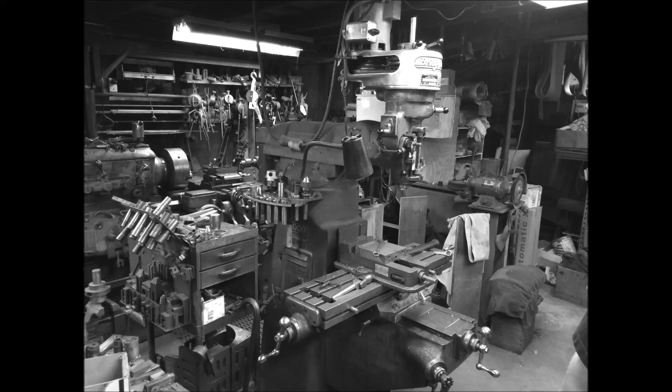I've been doing a little off-camera work here, and I'm finding a few things I don't like. So I've been prepping to remove the table. That part's going okay, which is going to require unhooking the ratcheting assembly here.

But in the process, I tried raising the table up, or maybe it's the knee, I'm not sure what you call it, but what I found is this elevation screw, the input screw, isn't frozen, but it goes to a worm type bevel gear that transfers to the vertical screw, and that vertical screw is frozen. I don't want to put too much torque on here. Unfortunately, to get to this screw, you have to come in from the bottom, so I'm going to end up having to pull this off the stand again.

Okay, so that's a little bit of a setback. I was hoping that I wouldn't have to do anything with that, but yeah.

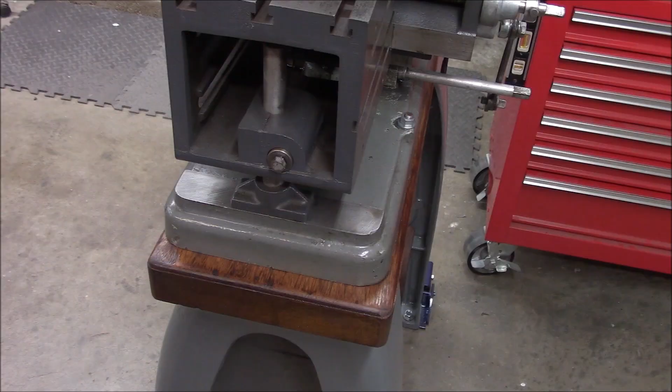The other thing is this front foot with the adjustable leg on it here. Something is frozen in here. I was able to loosen this up, and I don't know how much force it normally takes to adjust this, but it appears to be frozen also. But I don't think that's too big of a deal, I think that's just a matter of getting in there and doing some cleaning.

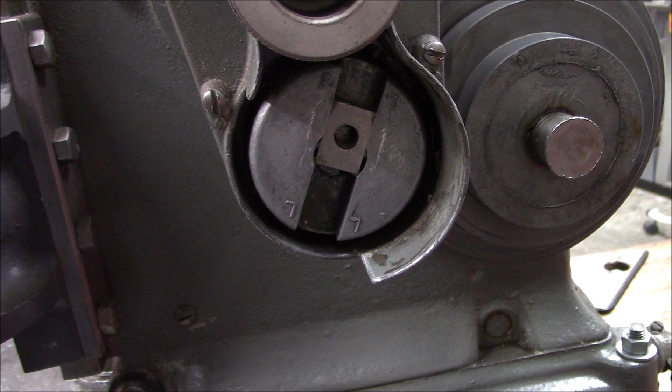Little midstream update. So we got the table off, and let's come back to that in a second, but I also have some good news. So this feed stroke assembly looked like it was severely worn, but it was just dirt and some old dried grease buildup. So that's good news, this looks fine. I think that will be good there.

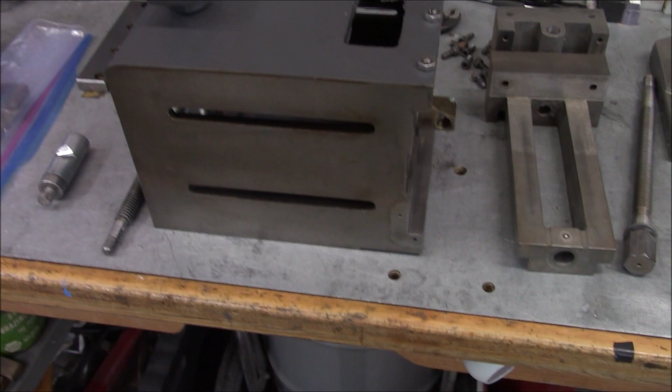Over here at the bench, so here's the table. Okay, there is the lead screw nut. There is some play in that nut, so I'm going to look at that and evaluate whether we're going to replace it or make a new one or what we're going to do there.

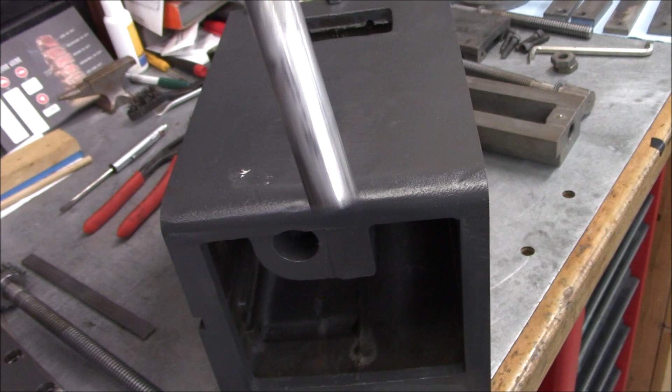We had one heck of a time. This is upside down, by the way. We had one heck of a time with this foot, and it would not budge.

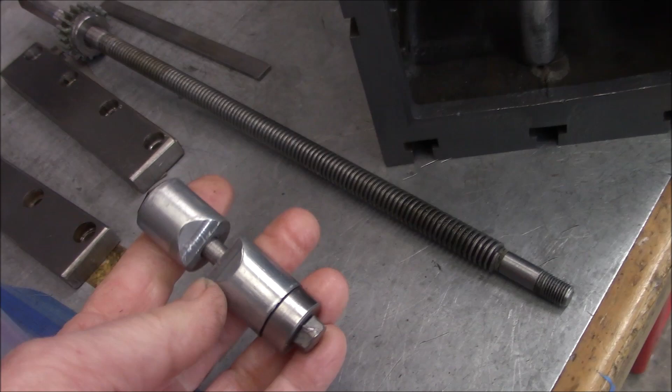So the problem was the clamping mechanism here. These little clamping pucks, they're made out of the Zamac material, and they're actually deformed.

It's kind of interesting, look at this. Look at this nut, I mean it's been gronked on pretty good. Let me see if I can take this off with one hand here.

So you've got, that looks like probably a 5/16 bolt. You've got a steel puck here, spacer, washer, and that pushes on this guy, because this is all Zamac. Can you see that distortion? This thing's really been gronked down pretty hard. So not only has it worn into the cutout here, this is actually mushroomed and expanded out on the end. So it was stuck in there.

And then this is the one that goes in the back, same issue, this one was even worse. And if I can get this out of here, what they have... Alright, as soon as I turned the camera off, it fell right out, of course.

So they just cast in a hex here, and then they use this little brass nut. The rounded part goes down like such. Okay, so anyways, that's how that's made.

I think what I don't like though is this shaft is not hardened, it's just regular mild steel. I think I'm going to make a couple of these, probably out of brass. This stuff, in my opinion, is just too soft. I don't want to make them out of steel because I think that may end up galling the support column here. Probably make these out of brass, and I can just thread the brass. I don't need to do this, and that'll still be fine.

And I'm not crazy about this bolt, I'll probably make a new one with a different type of head on it. Probably just go with a square head so it matches everything else.

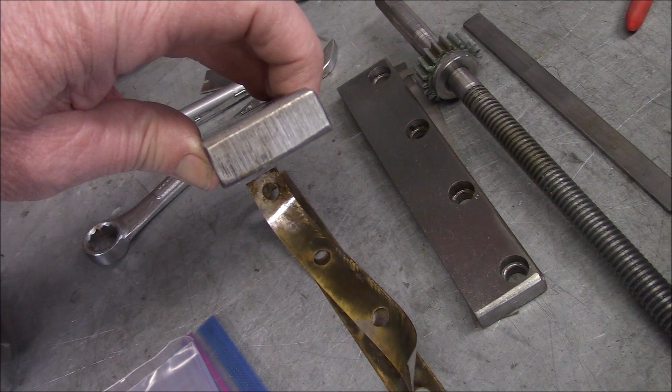That makes more sense. Okay, here's the retaining plates for the ways, and they are shimmed, and I've marked them with a letter punch so I know which is which. I need to measure and bag up these shims so I don't get them mixed up, although we're going to re-measure everything anyways.

Okay, here's the lead screw, and it appears to be in pretty good shape. It's got the Zamac gear. Now everything was coated with grease, this blue looking grease, including the lead screw, which is not right. Maybe okay on the gear, but not on the lead screw.

Okay, so we're going to fix that when we go back together. Here's the gib, it's got some dried up grease on here, but it looks like it's in pretty good shape. And then the actual way surfaces, they didn't do any scraping, it's just as machined.

I don't know how far we'll go with these. I'd like to check them at least, to see how flat they are. Looks like this side's got more wear than this side over here.

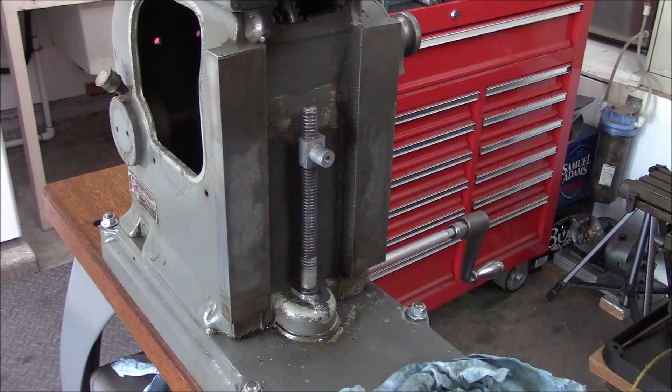Okay, we got the table off, no problem. And we solved the mystery of the frozen lead screw. It was actually the nut that was frozen. It was really frozen on there, because they greased it, and the grease dried hard, so it was almost welded to the lead screw. I soaked it with penetrant and solvent, and ended up having to warm it up a little with a torch to get that old grease to liquefy, and now we got it moving.

So I did some cleaning here because I didn't want to run any dirt through that nut. This nut is Zamac, but you know what, it feels tight, there's no play in that, so we'll probably just reuse it.

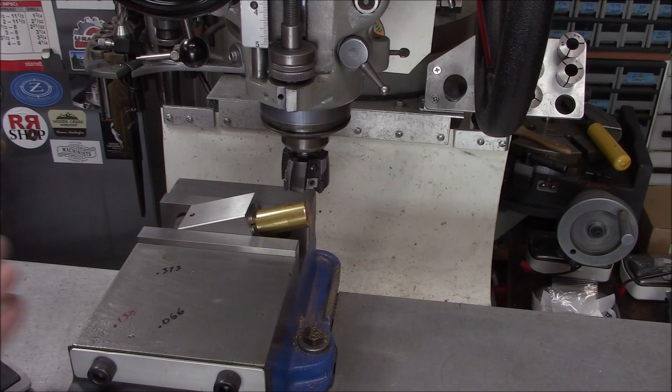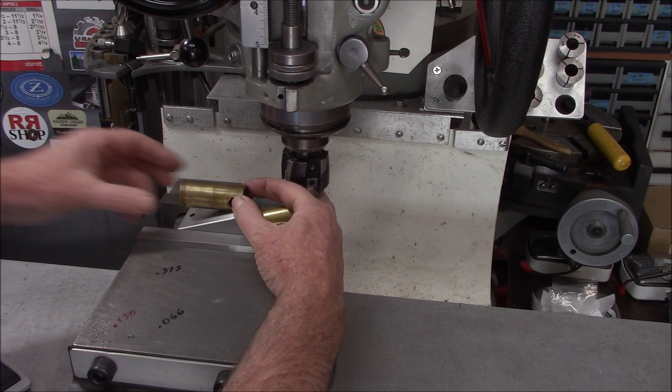We're going to take off this wedge part off of our feed nut here, and it's just for clearance. It's not anything critical, so rather than getting too elaborate, I got it in the collet block. I just put this on here and bumped it around until that was level with our block. Good enough. I got a scribe line on here of how far we need to go down. We're just going to mill it off.

Alright, let's get it a little more aggressive. Go 40 thousandths. I just don't know how well that collet block is holding this. I got it pretty tight, but still.

Alright, we're just about there. I think we'll just take 10 this time. We'll do a little closer inspection.

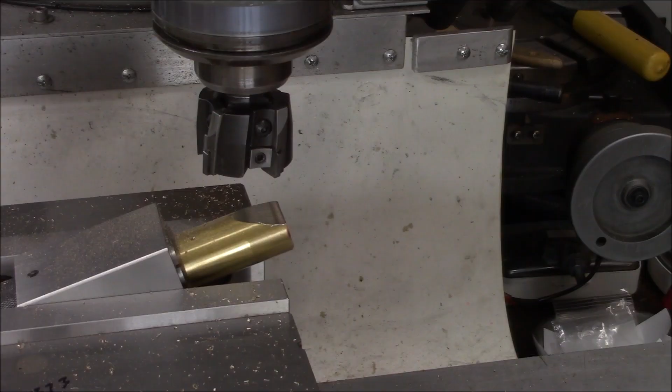Okay, I think we're there. Let me just check it off camera. Just doing the Mr. Bozo check here. Yeah, I think we're good. Seems to be matching up nicely.

Okay, I got grandson number 3 here. Say hi, Ethan. He's going to help me with the edge finder. He's going to let me know when the edge finder kicks over so we know when we're on the edge.

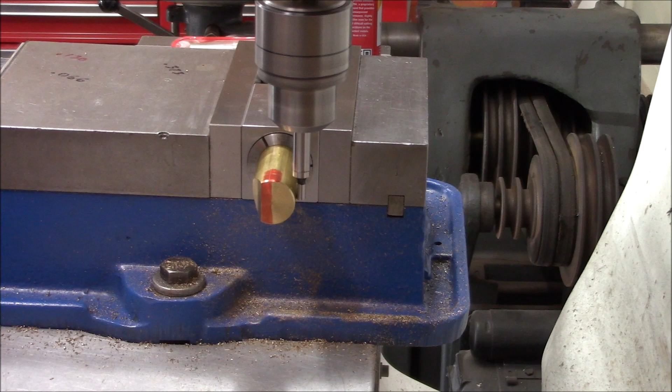Alright, you ready Ethan? Okay, you watching that edge finder? Oh, what happened? You're supposed to yell out and tell me. Okay, here we go again. Ready? How about that?

Sure? Is that good? Okay, I think you got it. A little bit further back. Okay, alright, so Ethan just double checked our setup here. We're ready to drill, we're on our scribe line and we're on center.

Okay, pilot hole. Does that look good? How's that look? Is that gonna work? No, it's too small. It's too small? Yeah, very too small. Alright, we'll put in the bigger drill bit then. Look how small that is.

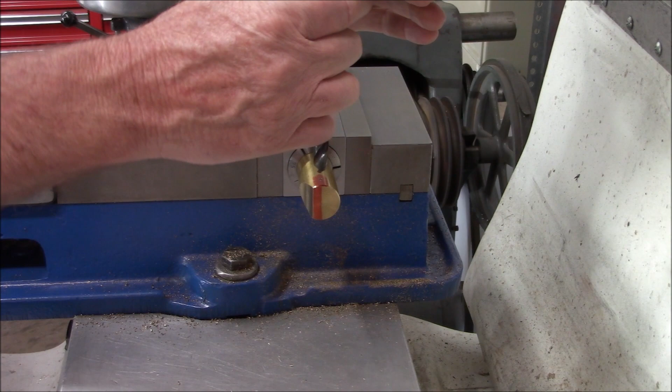That won't work, huh? Alright, well, look how big this hole is, compared to this one. Oh okay, so we need to make it look like that one. He's showing me the old one. I'm going to put it right here, okay? So remember what it looks like. Okay, so according to the boss, Ethan, we need to make it look like that. Alright, so I'm going to put that over here.

Safety glasses on. Okay, we're going to be throwing some chips, so we don't want to be too close here. Alright, here we go.

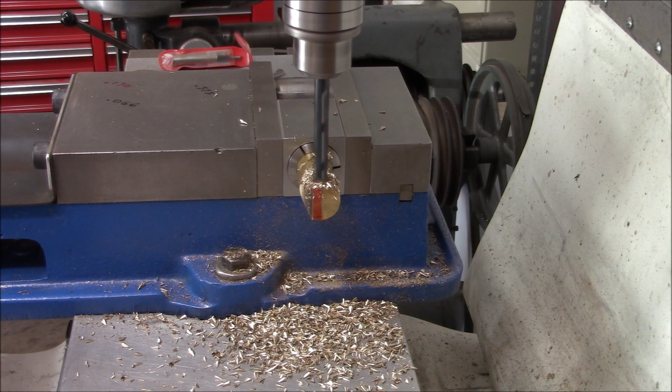Okay, we're there. We're through? Yep. All the way through? Yep. All the way through. Grab the old one, let's see if it's correct, okay? Okay, wait till it stops. Alright, let me take the drill bit out, then we'll take a look and see what else is needed.

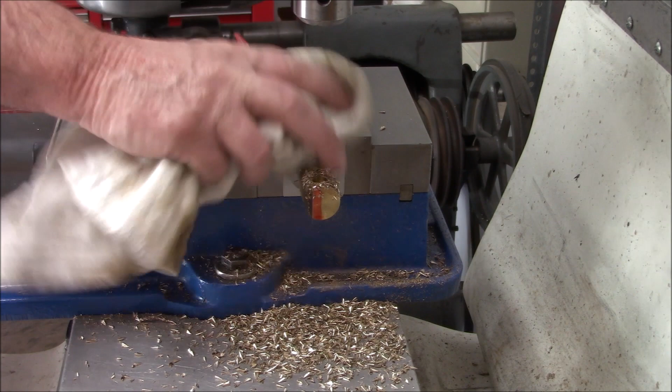That's a lot of little small pieces. Alright, so what do we need to do now? I don't know. You don't know? Well look in there, is there anything different? Can you see inside there? Oh, it's a little bit smaller. Yeah, but is there something else on the inside? Does it look like it's got threads in there? Because this hole is smooth, right? Yes. Okay, so we have to put the threads in. Alright, so that's a different tool.

Okay, now this is a left-hand thread, so which way do I have to turn it? Left. His left-hand, very good. Okay, lefty tighty in this case. Alright, here we go. Oop, keep up with our tap falling over here.

Break the chip. And we need it all the way through. Now you let me know when it starts coming out the other side. This is some tough stuff here. We gotta back it up, I see a little bit coming out the bottom. Oh, you do? So okay, it might be close.

We do not want to break our tap. Do you have another one of those? This is the only one we got - it just came in the mail today, even. So if we break this one, we're out of luck. Yep, you might have to buy 5 more. Because if that one breaks, then the other one breaks, and the other one breaks, and the other one breaks. Then you have no money, you're out of luck, right? Well, you still get paid because you stayed at work longer, right?

So this is kid logic here, okay?

We're pretty much done, right? Yep, just got to take it out of there, and then we're going to put a little bevel on there because I forgot to do that.

Okay, ready? We'll do a little chamfer just to make it look better and get rid of those little sharp burrs. Okay, I like that. We better do the other side too, okay? Yep.

Okay, so we line that edge up so that we're lined up, okay? Alright, see how ugly that is? It's got a sharp edge on there. We're going to get rid of that sharp edge, okay?

Okay, that's much better. Let's see how it looks. Okay, should we take it out of there and look at it? Yep. Okay.

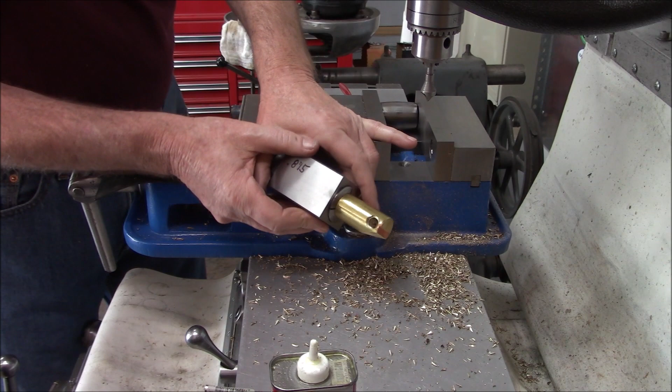Okay, let's move that so everybody can see. How's it look? Is that going to work? Oh, they're the same size. Okay. I guess I should hold it this way, that way they both look the same, right?

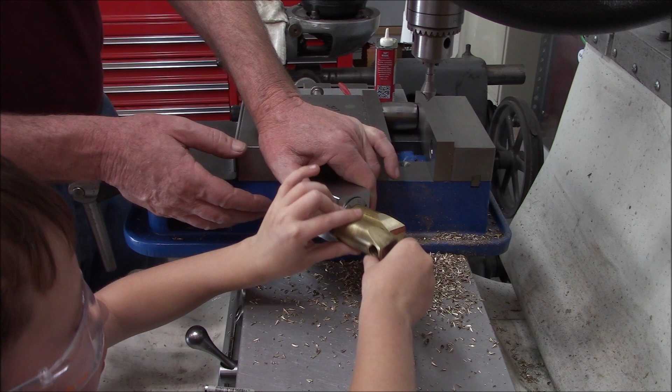This one's just a... oh, this one's a little longer. Alright, we're going to fix that, okay? Yeah, alright, good. Thanks for your help. But some of it's stuck in there, right? Yeah, some of it's in there, but it's still the same.

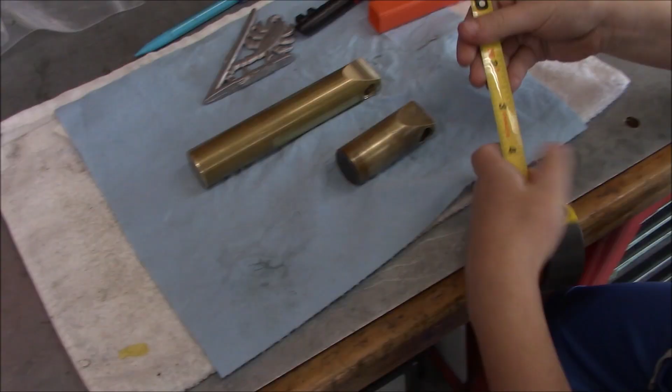Okay, we got to take it out of this block now. Right here. Right there? Just chop it off right there. Mhm. Okay. Not the measuring tape, though.

Here's how that nut turned out. I didn't get a chance to film it toward the end there. I did test fit it on the lead screw and it fits really good. So happy with the way it came out.

Okay, let me get a measurement.

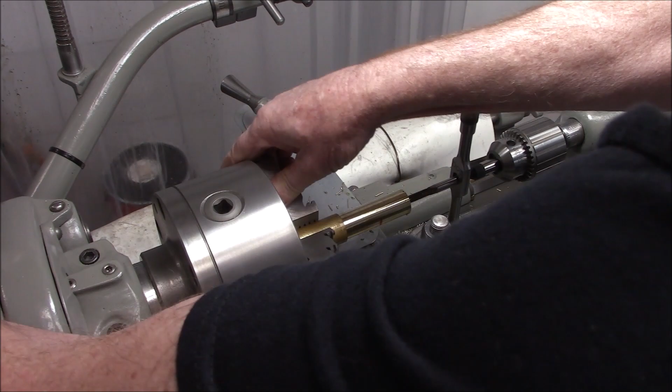Alright, this is going to take a few minutes, so I'll bring you guys back when I get this tapped out. We're going to give our parting blade a try. This is always an adventure.

So don't work on projects when you're tired. You guys probably noticed I forgot to chamfer those edges on that last part. Alright, let's face this guy off a little bit here. Parting tool did a pretty good job. We'll just get a fresh face cut here.

Working on a bit of a measuring challenge here. So I want to reproduce these locks for the table foot. So the table's upside down. This is where the foot or table support would go. And then the locking pucks go in this bore here. There's one on the back side, one on the front side. Okay, and then they've got this radius in here that would match this, but the trick is figuring out the center line offset. So trying to figure out how to measure that.

So what I ended up doing was just using a depth mic. This side here, this side's machined, and I had a little trouble. There were some burrs on here, so I had to stone this off. So I just came in with the depth mic and measured this distance versus this distance. And then had to do a little bit of math.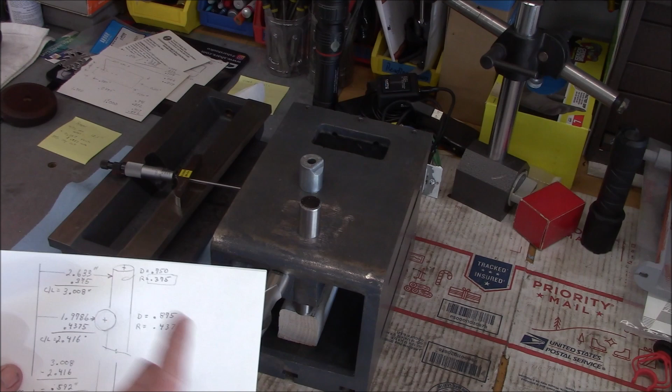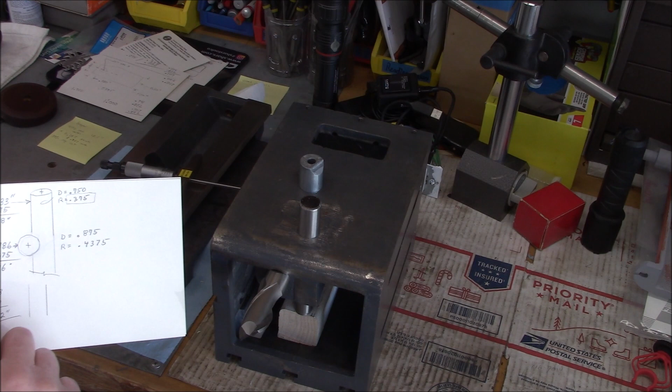So took the measured distance and then the radius of this guy and came up with 3.008. And then this one from this edge was this number plus the radius of this guy, which is a different diameter. It's 7/8, this one's 3/4. Added that, came up with this number, 2.416, subtracted the difference, and this is our offset, centerline offset between these two bores. So hopefully with that, I'll be able to go over to the mill and reproduce that little offset with a 3/4 end mill. All right, so let's go do that.

Feeding really light because I don't have a real good grip on that collet. There's not a lot of insertion into the collet. We're almost there. Let me get a light.

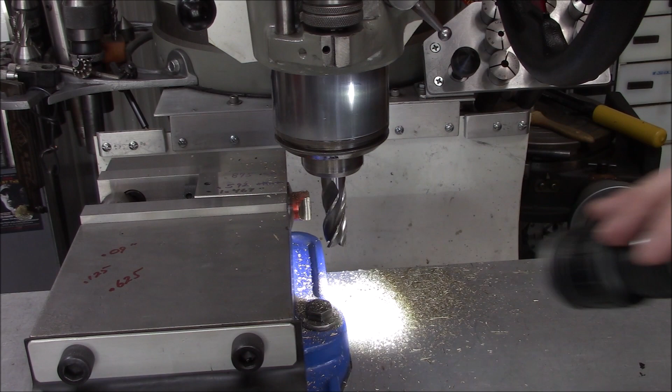Just a tiny bit more. All right, I think we're there. A little bit of deburring. Let's check it before we do the other one.

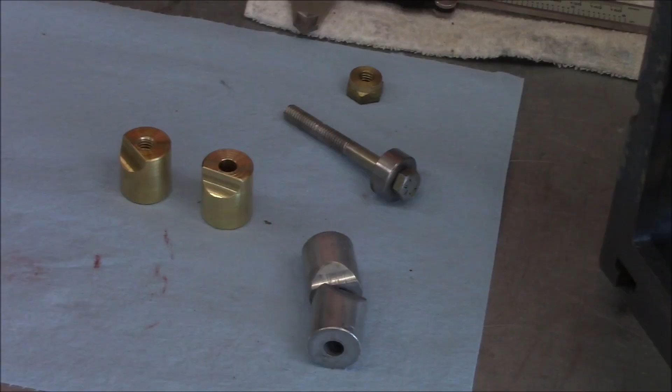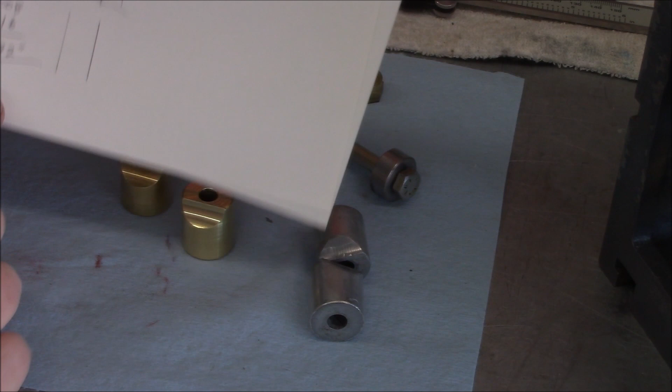All right guys, so we ran into a little bit of a problem, and it was kind of perplexing. I was very careful when we did all our measuring to figure out what our offset needed to be so we'd get a nice contact with our radius here and the foot. If we hold these up, I know you won't be able to see it well, but our radius matches really good, and we've got about a 30 thousandths gap between our blocks when they're making nice contact, which should be fine.

But when I put it in the machine and snugged it up, looked, then pulled the foot back out and checked the spacing, it was like this. What the heck's going on? Hopefully you guys can see that.

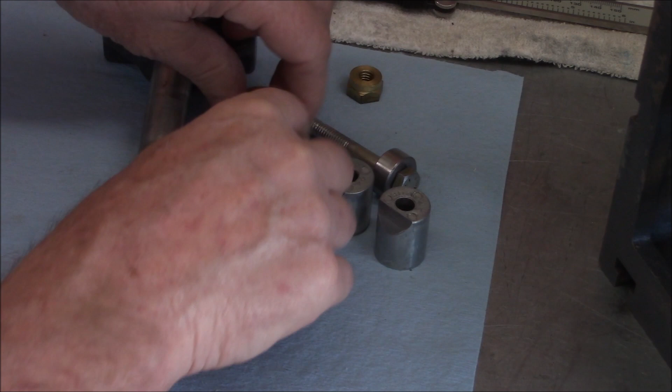Then I noticed we had the same problem on the originals. I figured on those it was just the casting not being very accurate, and I wasn't too worried about it. Let me bring you over here and show you what I figured out.

So what I've determined is that the bore for the lock that holds the lock slugs is not true - it's at a slight angle. This is a crude way to measure it, and the only long piece of 7/8 material I had is this big valve, so I've got a helper here holding this.

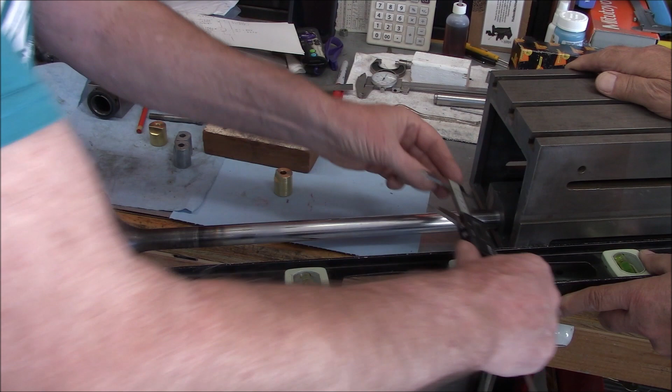I'm going to measure, let me go this way so I can read it. I'm going to measure here, and I got 1.9774 - actually make that 1.976. If we come out here, I got 1.928. So it's definitely not bored true to the rest of the table, and I think that's what happened.

So even though I carefully measured out here, because it's at an angle, I didn't get the right offset. So what I'm going to do is put this back in the mill and take 5 thousandths off that way, take a little more off, and then we'll recheck it.

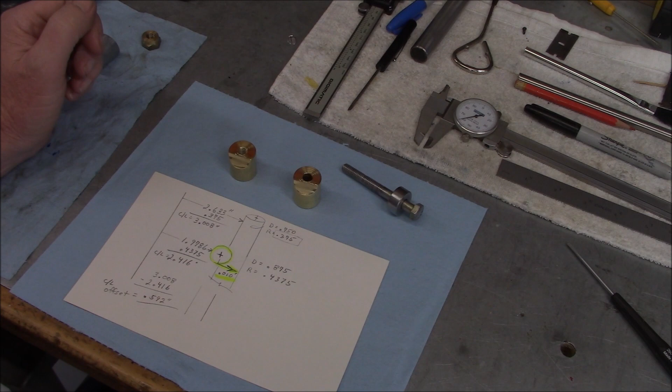Well guys, since that last clip, a whole day has gone by. I just barely got going on this yesterday, and a friend of a friend of a friend came by with one of those hey-man emergency projects. So I ended up doing some machining on a hydraulic pump magnetic clutch. We got that taken care of for him - didn't get any filming on that, it was a scramble to get it done.

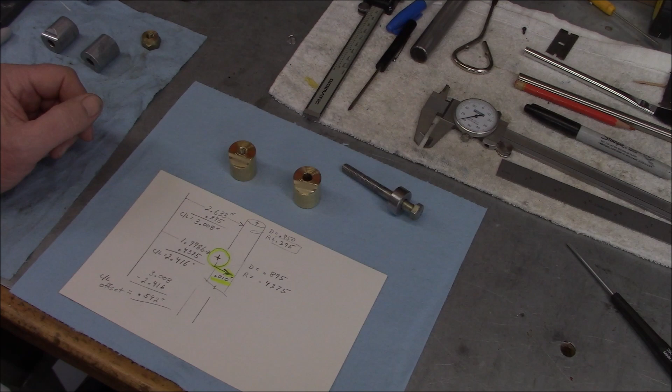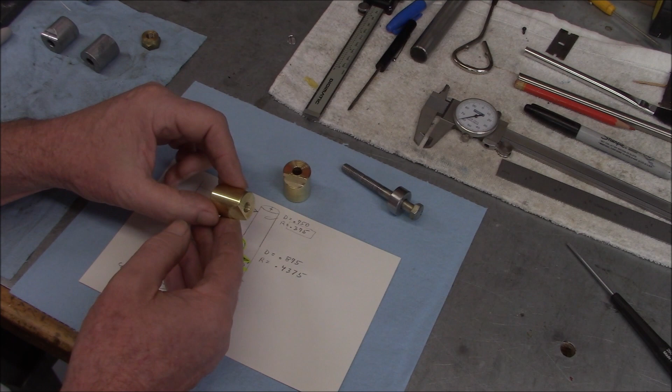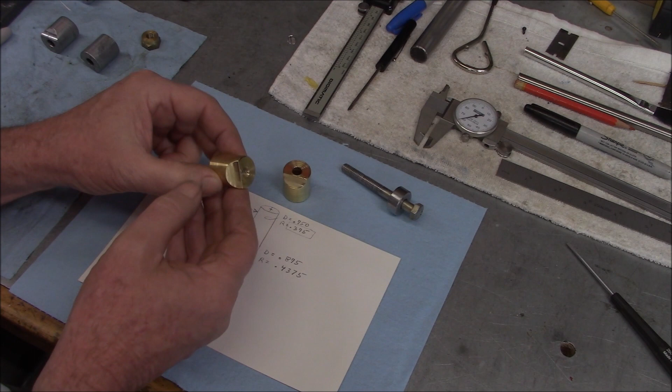So anyways, I started with 5 thousandths, then ended up going 10 thousandths. I set these back up in the mill and used a piece of dowel to line these back up again, then we milled in that direction to take a little more material off, and it worked out perfect. Then just to make the fit even better, I went in with some lapping compound.

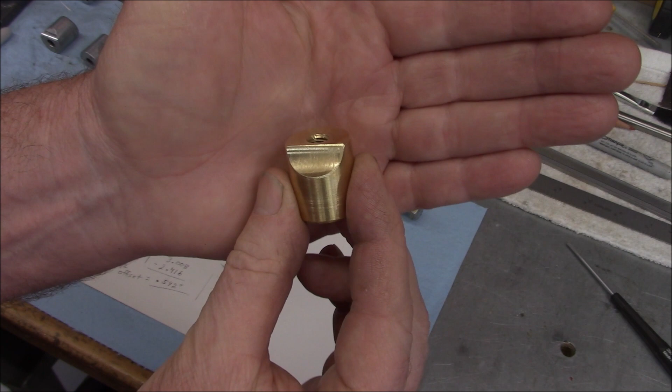I know it's probably total overkill, but I lapped these in. Let me see if I can show you - see the dull part of the cut there? That's everywhere the lapping process was making contact. So only right here is the only little piece that was not making contact.

Man, that's really good. This is the one - oh wait a minute, I got them backwards here. Okay, so this one is the one that doesn't have any threads, so it actually looks a little better because it can float a little more, where this one has the thread.

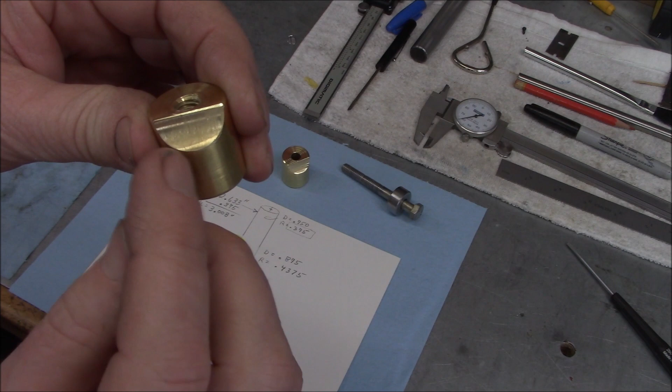So when you're tightening it up, it puts a little twisting torque on it. If you get the light just right, you can see there's a little more removal on one side versus the other. But man, the fit is really good and feels much, much better.

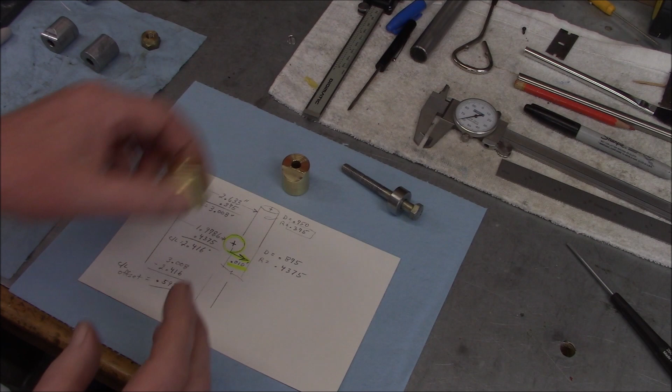I cleaned everything really good. Normally lapping is not something you want to do in a moving machine part, because you'll never get all that compound out. But this hardly ever moves - you'd make a couple adjustments, just a couple times a day. You move it once, you lock it. So it's not like we're going to be continually rotating that shaft or moving this around on a continuous basis. I think it'll be fine.

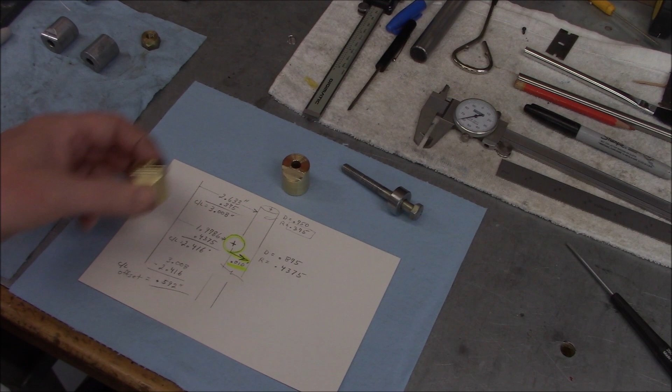All right, let's move on. Oh, and I don't know if I mentioned this on the other one, but I'm pretty sure that's why these original ones have all the wear marks up toward the nose of the cutout here - it's because it was not on center. I don't know if this is a common thing, but if you're doing one of these, just be aware that you may have the same issue.

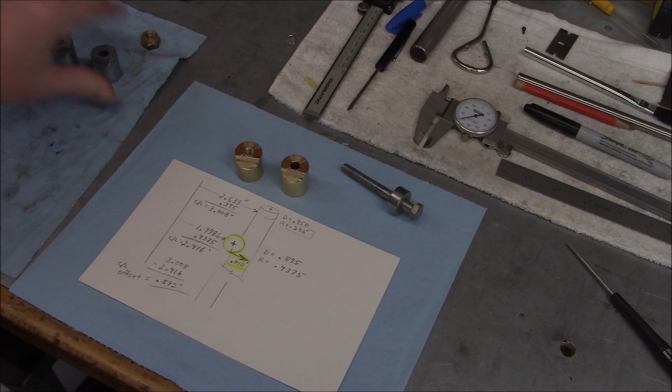Just giving you guys a look in here. So I put the support column in, snugged it, and then carefully pulled it back out. That's what our fit looks like down inside the bore there.

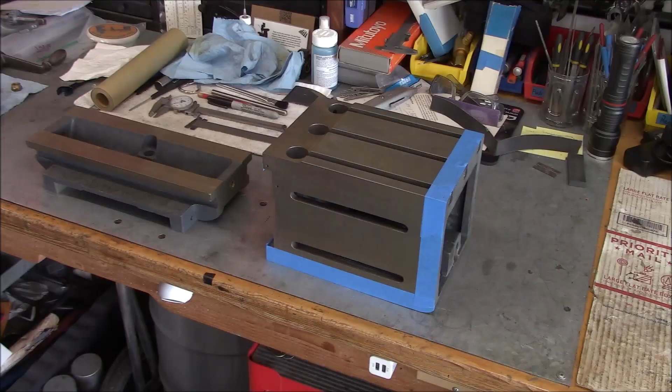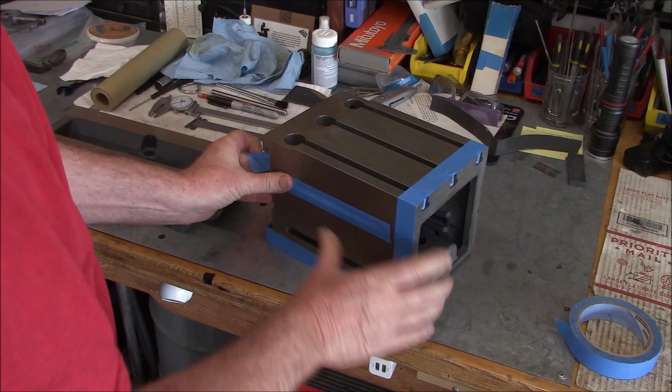I know how exciting it would be to throw in, oh, maybe 2 or 3 hours of paint prep and sanding and masking and so forth. But in the interest of time, I think I'll just throw a few still shots in for you guys.

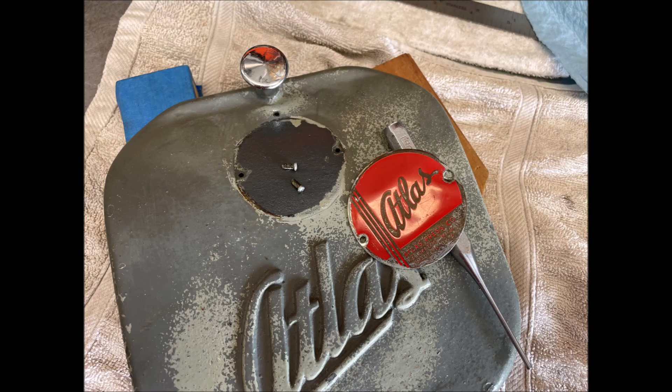How you doing, Ethan? You almost through? No. Halfway. Halfway, okay. Not even halfway.